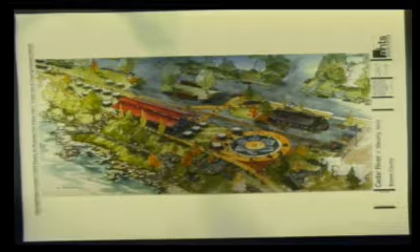In those plans, we had planned a wood deck at the existing scale building. It's made out of bridge timbers, like 3x10, so they're really strong. When we did the original design, we didn't really know what the existing structure was there, but we wanted to hang it onto the side of that. But a structural engineer wouldn't sign off on that because we didn't know what it was.

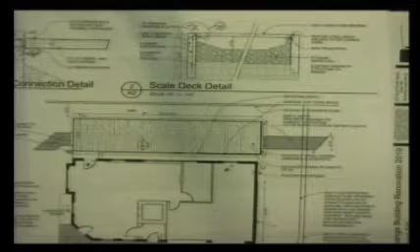So at that point we started digging, and we found out that it was a hollow structure. This shows a plan of that, and all that structure was intact, in fact built very well. It's almost like a swimming pool, and it holds water. So our recommendation was then to drill holes in the bottom, because we did find out from Crystal Plumbing and Heating that there was no water when they did put the water service in. So we think that the groundwater level is low, so we're not going to get a lot of intrusion of water.

So that the rainwater will then drain out of the pit. That plan shows basically a wood structure holding up a wood deck that's designed for 100 pounds per square foot, which 50 will hold a car or a truck. And that's basically what we want to do. We're concerned about putting a slab on grade there because any of the fill material will have a freeze thaw and raise up and down differently than the scale deck, and so we'll have multiple points where we cross that, where we'll have tripping hazards.

Maybe that's all you need to know, or if you want it. Did I read in the materials that you're also proposing to put a sump pump in there? Is that true? We did, but after realizing that we did have a low groundwater level there, we think that the relief valves, or the drilled holes, will relieve all that water.

It's something we could add. If we fill the thing with dirt like they did previously, or rock, if we ever have a problem down there, we're going to have to dig it all out again to find out what's going on. And we don't want to bust the structure up because it's integral to the whole building. Its whole foundation is tied together, so we don't really want to cut into it that much.

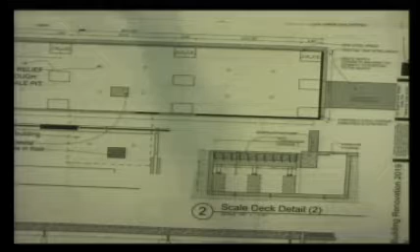So if you look at the section view, we're setting that structure on top of those piers. The piers are wooden, concrete at the base and then wooden, then the wood deck, 6x6 treated timbers with brackets, et cetera. We can always access that from the inside at the access hole that originated there where the scale mechanism came up through, and go in and check the understructure or do any maintenance.

Or if we get mosquitoes, we can go in and take care of them. I don't think we will.

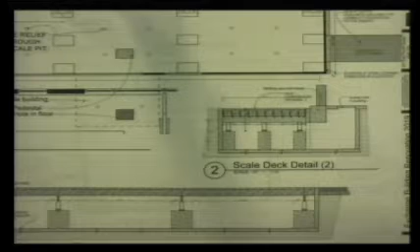What is your best guess as to the lifespan for that wooden platform? How long should we expect it to last? Well, it can last a long time. We've got bridge timbers right here that we've got a trail on, a bridge on the bike trails, 3 inches by 10. It's going to last quite a long time.

Well, a bunch of the ones we saw pictures of are rotted on the bridges we're looking at tonight. Really? Do you have a guess? I'd say the piers and deck will definitely last a lot longer than the concrete, before the concrete cracks. So the guess could be 75 years. This bridge out here was built in 1998, 99.

Is there any concern with moisture, just damp air accumulation and mold in that cavity? Not really. I mean, it was that way for years when it was a scale structure too, empty with the mechanism in it, et cetera.

Any other questions for Larry? So I see we're going to have this access hole in the building. On this diagram here, it looks like there's an access through the wooden structure. Is that the scale? This is inside the building here. Right, so that's where the access is.

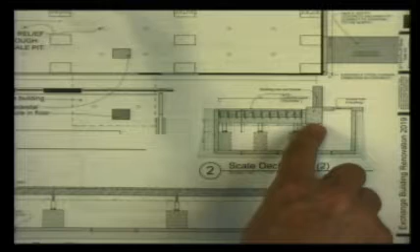There's a big bond beam here that holds up the structure. So over on the left, you have the pedestal, the floor and the hole, and another arrow going up to a square. Yeah, that was the pedestal that held the weight mechanism. It's exactly opposite of the access hole, it's a pedestal, we're not building. So that's basically on the floor of the pit. It actually rises up above the pit too. But that's not going to affect the decking at all. No.

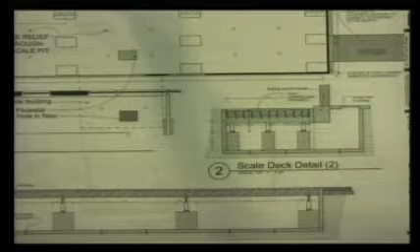How deep is that? Oh gosh, I don't know if I put a dimension on it, but it's about 4 or 5 feet. Was the pit itself? Yeah, the pit itself. So it's below frost level. It's closer to 7. Is it? I would guess. I think that's 7 from the top. But if you're talking about from the bottom of where the base is going to be, from the top?

From the bottom, if you had to have somebody go in there to fix the structure, how much crawl space room would they have? That's a pretty good size, about 4 feet. Yeah, there's room to go in there.

Any other questions or comments? I just want to emphasize to people that this is not a functional scale. They cannot expect to stand on the scale and find out how much they weigh. This is just a historical replacement of what had been there. After they go for ice cream, they can't scale before and after.

We met with this historical group prior to this, and they would like to see the wood deck also. That does raise an interesting question, though. Is it something that it would be possible to drive a vehicle onto? We don't want the general public driving on there, but it is designed to hold display items like Santa's sleigh, an antique truck at the farmer's market, or an antique fire truck. It'll hold all of that.

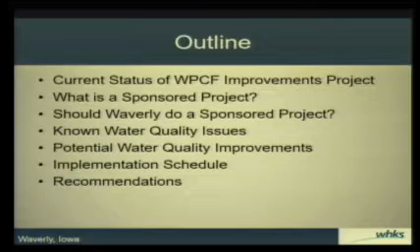So it's been 2.5 years since we've been here. We, at that time, encouraged you to start thinking about this improvements project and moving forward with it, both from a design perspective and financing. So that was December 2016, and you have been proceeding forward.

WHKS has been working on that preliminary design. We've completed what we call the 30% design of that, and have been working with Mike and city staff to review it and hone in on the conceptual plans. But you've also been working on the financing portion.

So the project is now listed on the state revolving fund list, intended use plan. So you're looking at getting a loan through the state. Ultimately, the plans we're looking to complete in 2020, construction in 2021 and 2022, and then your permit says we need to be all done with this and construction done by November 1st of 2022.

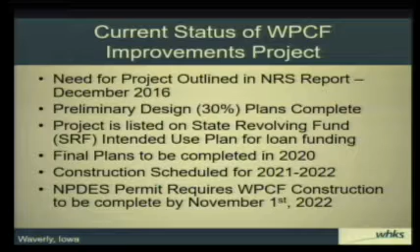So why SRF loan, and what is a sponsored project? The sponsored project is a pretty unique opportunity that the state has put together in conjunction with the SRF loan to help incentivize communities to use the state's low interest loan money. So instead of just getting a locally bonded project, they've provided this carrot for you to say, hey, if you do an SRF loan with us, then we will provide the sponsored project opportunity.

So the project will be paid for with the interest rate reduction from the SRF loan. It takes some of that interest money and uses it for this side project, and it's approximately 10% of your project loan amount. So we were talking about a roughly $9 million project, so that's a pretty good chunk of change, $900,000 water quality sponsored project.

There are some rules that go along with it. It must be done in the same watershed as where the city resides. It has to kind of benefit you locally, and you need to work in partnership with another water quality organization. You're going to have to partner up with somebody to do this work, and there needs to be a specific benefit shown of how this project is going to improve the water quality.

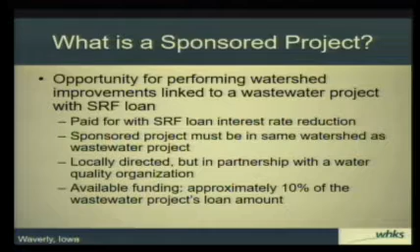This map here just shows the different water quality sponsored projects throughout the state. There's a little over 80 of them currently. Roughly half of them are either under construction or have been completed, and then there's another 40-plus projects that are in the planning phase right now. So this is definitely something that has been catching on, and a lot of communities have been starting to do these sponsored projects.

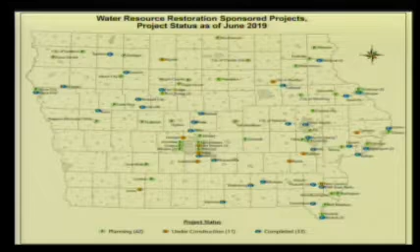And what does that project entail? There's a litany of different things that you can do for water quality improvement. Some examples: permeable pavers, rain gardens, bioswales, things that will help that surface water quality, stream bank stabilization to help reduce erosion, and then wetlands restoration. And that's one we're starting to really focus in on, as wetlands restoration for nutrient reduction at the surface in addition to the treatment plant.

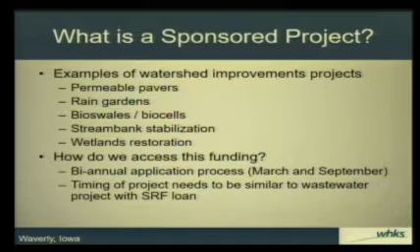And how do we get this money? There's, like Mike alluded to, a March and a September application period. So twice a year, if you're on the intended use plan, you can submit an application to try to get on another list to get the sponsored project funding. The timing of this needs to run in parallel with your treatment plant project. So we're not able to really do the sponsored project until you have secured the loan with the state, and they know that you're going to be taking this money through the loan so that they can use that interest rate reduction to get you your sponsored project money.

So, okay, that's great, this sponsored project program exists. Why should Waverly do one of these? Like I mentioned, there's about $900,000 of money that's there to be able to be used, so that's a pretty good chunk to take out for a project. And in addition to that, and Nate can talk about this a little bit more, there's this partnership that we are recommending could potentially result in even more local funding, or sources of funding through other organizations that could pair up with your sponsored project money and create an even larger project.

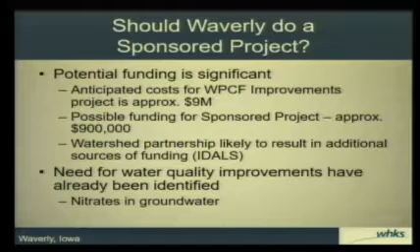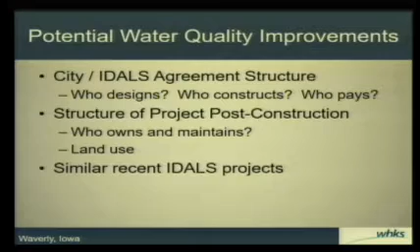So these projects, what do they look like? Well, they're essentially building a small dam that creates a wetland impoundment behind it. This is one that we finished a couple years ago in Floyd County. Their designs are pretty standard - they use these sheet pile weirs to control and regulate water level, and then maintain drainage throughout the system, as that's a really important component. So I thought it was important for you to see a picture of what some of these projects would look like.

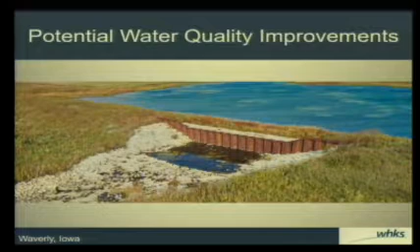And then we get into the implementation schedule, and this really goes down to how this is all coordinated with the SRF portion of the project. So we're looking at preparing an application in June or July of this year, with approval in August, and then assuming that would move forward, we could work with IDALS for preliminary design in the winter, spring of 2020.

Receive the design concepts from the DNR spring, summer of 2020, and completed design in 2021. So then the whole process would be that the SRF funding for the loan gets approved, followed immediately by the issuing of the money for the wastewater plant, then this money falls in place after that. So the construction of the sponsored project essentially starts shortly after the wastewater plant and occurs concurrently.

So when this is all said and done, basically that money gets turned over to IDALS. There's no responsibility for maintenance, there's really no responsibility from the city at that point. You're just essentially taking money from one state pot, moving it over to the next. The landowner is responsible for the maintenance. It's just that you as the city receive the benefit in terms of significant nitrogen reduction, and ideally that is received favorably by your wells.

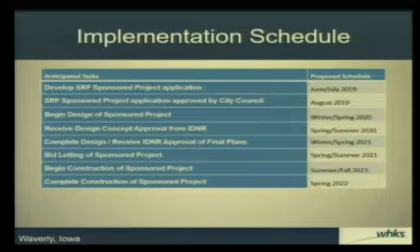So with that, we were recommending that we proceed with development of the application, and come back here in August. We are working with IDALS right now to shore up some of the landowner interest and work on some of the feasibility. These things are very preliminary at this point, as I said. We can't go too far without having the funding in place and having the commitments in place. And then pursuing sites either F and G or both, depending on the level of interest by the local landowners.

So that's kind of what we're recommending at this time, and we'll have to see where all of this leads us. It's not to say that if one or both of these projects didn't work out, other options for this money might be available, but right now we see this as your best bet in order to address your needs.

Okay, thank you. Questions for council? Can you put that slide up there again, though, just while you guys are asking your questions? Could you put the slide with the wells up there again?

Sure. Thank you. Kind of the answer to that at the end was, is this a one site only or multiple? And I know they had the 6 on the east side and the 1 on the west side that were kind of identified there. So potentially down the road, we could end up having a series of these staged along there.

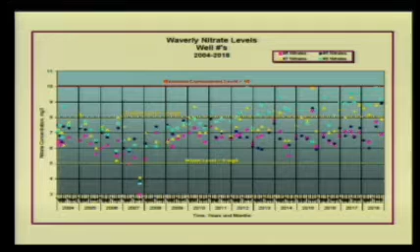Yeah, and I think it builds a lot of goodwill too. I mean, it's showing you're getting benefit, but so are people in the greater watershed, despite the shared cost.

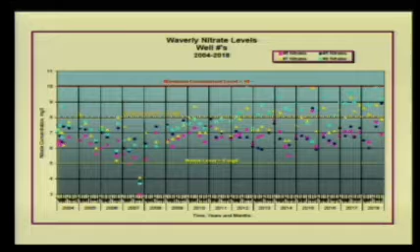Are there any other requirements to either the grant or applying for the state revolving fund monies, or the fact that you partner with someone? Are there any hidden costs in any of that? I mean, sometimes you have to use certain materials or certain contractors - are there any costs there that we might otherwise be spending less on that you would anticipate by virtue of being involved in this? No, essentially it's an opportunity project, where you see a need and can address that need and push it out to your watershed to do this type of thing.

That's really what they're encouraging, but it's not intended to be a way to get additional funding from the city. This is a way for you to focus state funds on things that you value, things that you see as important to your community, versus the state picking for you, essentially.

To answer that question from the SRF loan perspective, there are some additional costs with the SRF loan versus just local bonding. The SRF loan does have some costs in terms of wage rates, and they would have the American Iron and Steel requirement that would drive up some of the prices of your wastewater treatment plant project. If you were not to do the SRF loan and locally funded instead, there'd be a slight reduction there. But we think that the sponsored project reward is worth the added cost of utilizing the SRF loan.

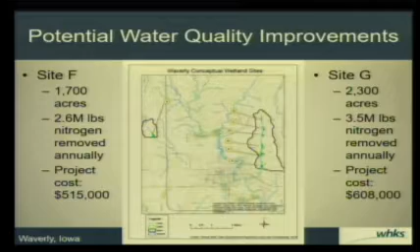So a structure like this provides multiple benefits. It does provide a limited amount of flood control, but it's not really designed for flood control—just by its very nature it provides a limited amount. They're really designed to be shallow pools of water, less than 3 feet deep, so that it can establish all the wetland plants and the microbes in the soil.

And it's those microbes that take the nutrient water, the nitrate-laden water. It comes into the upper end of the system, and by the time it gets to the front end, or the release side of the system, most of those nutrients are digested, if you will, or metabolized and released into the atmosphere.

Bill, I'm not always good at reading these terrain maps, and even the scale I might be off on, but F and G look kind of close to that property we talked about a while ago, where development wasn't approved in the end. Is that over by— it's east, northeast of there. Is there some way to enlarge that? Oh, is it northeast? Yeah, okay, northeast. Okay, well then never mind.

And where are these two wells? Wells 7 and 8, relative to those sites. If you know where the Cedar River Parkway ties into Highway 3 East, that is very near well number 7. So you turn onto the Parkway and well 7 is just off to the left.

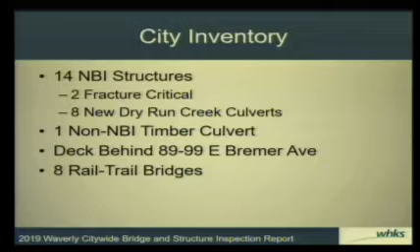This deck, just to get my bearings right, is this south right here? Just to the south of us out here is the deck we took a look at, and then the rail trail bridges. We'll walk through each of those and what we saw and what needs to happen.

Real quick, an Adams Parkway update. This bridge was built back in 1968, and you expect maintenance on a bridge. This bridge is actually beyond what we'd typically expect needing maintenance, partially because of the volume. Also, it was constructed well, so an overlay, which is what's being performed out there, where they mill a portion of the surface off, make repairs to the deck where necessary, and pour back a 1 3/4 inch thick overlay surface, is typically expected in the 25 to 30 year range for the DOT's higher volume bridges. So we're looking at a significantly longer life out of this bridge before needing those repairs.

Additionally, at the ends of the bridge we're replacing the joints. The previous joints were just 2 plates that slid over top of each other, so they didn't prevent water from getting down. The joint being installed now actually has a gland in it that allows the bridge to move and stretch, but also keeps water from getting down and affecting the ends of the beams and bearings. So it'll provide additional life to the abutments and to those beam ends and bearings.

So with this repair, we'd hope to see again at least 25 to 30 years before any additional maintenance is needed. The way bridges are designed, we take into account that wearing surface, that additional 1 3/4 inch being put on ahead of time, so this doesn't have any impact on load restriction. We verify that ahead of time before we raise anything or add dead load, obviously.

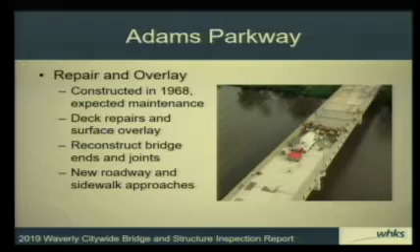Fracture critical is a non-redundant steel structure with tension elements — that's the book definition. This Adams Parkway Bridge is a steel bridge with 2 beams, and because it only has 2 beams, it's non-redundant, meaning if one of those beams failed, the whole structure fails. The truss out on 3rd Street, because there are only two trusses running parallel, if an element in tension would fracture, it wouldn't be able to support itself because it can't distribute the load. If you have 3 or more members, you have redundancy in the system. So any steel structure that doesn't have appropriate load redundancy is considered fracture critical.

So that's somewhat helpful — that's our book definition from training. For example, the Cedar Parkway, where we're putting in this great new bridge, has all kinds of extra beams, made of concrete. So it is not fracture critical. Exactly, it is not fracture critical.

Okay, yeah, that's helpful. The unfortunate incident on I-35. One of the most public recent failures of a fracture critical structure was up in Minneapolis, I-35 West, because of one gusset plate and a lack of redundancy. When that gusset plate fractured, because of the age, the loading, the stresses that were built into that structure and what was all going on at the time, the whole thing went into the water.

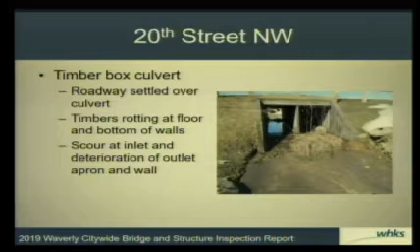As you can see in this next picture, with my hammer, I didn't have to hit it - I could just poke the tail of the hammer through there. The way these are constructed is that they're individual 2 or 3 inch boards laminated together, and that's one board that's rotted out. There's not large areas; it doesn't progress the way spalling in concrete progresses, because that's a continuous wall or continuous mass. It'll isolate to a specific timber before it spreads rapidly because of the construction type.

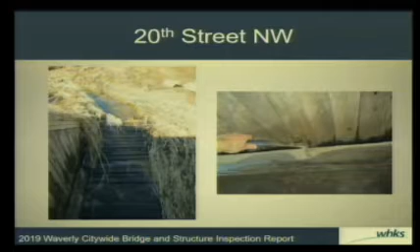So we don't have serious concerns about this now, but we want to bring it to your attention because down the road, it's not going to last forever. You're seeing timbers rot through. There's a little bit of scour at the inlet. At the outlet side, there's a CMU wall and the apron coming out where we could see some of the block face beginning to fail.

The settlement - we probably don't know enough about the right-of-way in the area. Does the city own that wall, or the property owner? That would all come down the road in planning for some sort of repair or replacement project. Go ahead, question, Casey.

Just for location, is that the one that's part of the curve? Yep, if you're going north before you hit the curve, if you go straight instead of going north and then west on the curve. So it'd be south of Fifth Avenue? Yes. Okay, yep.

So the recommendation, or the perceived replacement there, would be a concrete culvert, pretty similar - probably a single cell would fit there. There are sizes large enough to replace that as a single cell. We're looking in the neighborhood of probably $120,000 to $140,000 to do the culvert and the roadway work adjacent. That's something we want to make you aware of so the proper planning is there.

I don't think this is a 2-year thing or a 5-year thing necessarily, but it's probably a 10-year horizon thing that you want to plan for, and be watching if spot repairs are necessary or some protection needs to be installed to extend the life a little bit until the city has that budgeted and planned for.

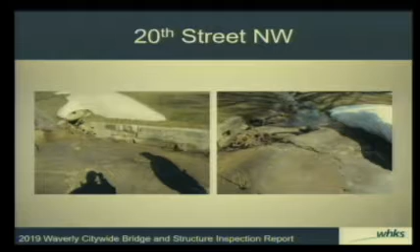Any questions on that structure at all?

The next area that Mike asked us to look at, a little different than we've done in the past, is this deck off the north side of the buildings on Bremer Avenue. It was brought to his attention that the public may have seen some paint flaking. Corrosion is a really ugly thing, and it's in your face when what's directly adjacent is bright green. So it was brought to our attention, and we had the plans Mike shared with us, so we could investigate how it was built and what was out there.

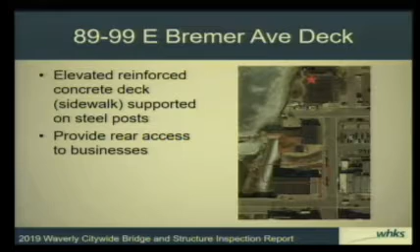From our side of things, structurally, is the amount of corrosion a concern from a loading perspective? What we found was that primarily the corrosion is taking place on the top posts on the north edge, where the sidewalk drains away north of the buildings and over the edge, dumping whatever salts those business owners are likely throwing out there, understandably so. As an elevated sidewalk, it naturally freezes very quickly, so ice mitigation is necessary. That's the primary cause of the corrosion you're seeing there.

One thing about steel is that when you get that leaf rust, once the paint system fails, the corrosion is expansion of the laminations of steel. An inch of lamination that spreads away from the steel is likely less than 1/16 of the actual steel loss, because it goes down to a microscopic level. So the corrosion we found isn't a structural concern to us, but you now have exposed steel that every winter is cyclically exposed to salt, and once exposed, the rate advances substantially. So we'd recommend getting this programmed quicker than that timber culvert for repairs to the paint system there.

We prepare plans and do a lot of observation for the state for bridge painting. It's a similar procedure here. Because of public access, some railings might be able to be unhooked and hauled off site and done in a shop and reinstalled, but these are embedded in concrete, so they'll have to be done on site. The likelihood of dangerous contaminants in this paint versus bridge paint is very low because it's not that old. You'd probably follow the same procedure though - send in a paint sample, and as long as there's no dangerous constituents, you wouldn't need total containment.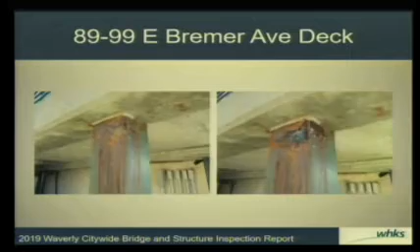One area where it's a little more pronounced is coming down the stairs on the west side, and again, salt on those stairs. They're supported by a steel outrigger that's bolted to the wall, so the bottom's there. All that salt slowly runs and drips down, and that system has failed. Because that steel is expanding as it corrodes, it's anchored and embedded into those concrete steps, so it's spalling some of the concrete adjacent to those anchors as well. So again, another reason you want to address this before the spalling advances - those steps need to also be replaced. Just bringing that to your attention.

But again, this is an area where more than spot cleaning - on the stair tread supports you probably want to clean and paint the whole piece, just because of the extent of the corrosion there. But again, it could easily be in the $50,000 to $60,000 range, depending on the level of containment and the type of removal necessary.

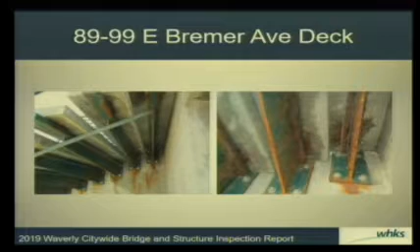So the way you're describing the corrosion caused by salt here, sounds like there's no way of getting a good fix on this - this is going to be an ongoing problem. It's likely an ongoing problem.

What we typically attempt to do, what we've done at the Cedar River Parkway with the plans we prepared there, is galvanizing before painting, so that even if the paint system fails, there's a secondary coating. That's kind of the standard of practice now that's developed over the years for exposed railings and things like this. It's not done everywhere. It's definitely a little bit of added cost, but it should improve the lifespan and reduce the maintenance on railings that are going to be exposed to road salt or sidewalk salt.

Is there any way to mitigate the salt water on the deck from rolling over the edge and back underneath to get into those beams? Going back here, you can kind of see on bridge decks on the overhang, we put a drip edge cast on the underside of the edge, so that it doesn't migrate down the underside of the deck to the face of the beams. Something like that - you have a drip edge on the side of your roof that directs things along the side, away from your fascia, so it doesn't collect there and into your gutters. So something might be able to be installed to mitigate that.

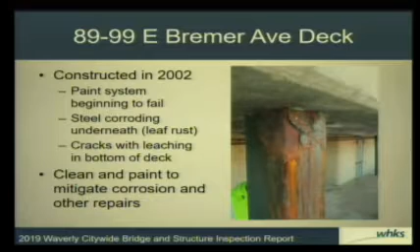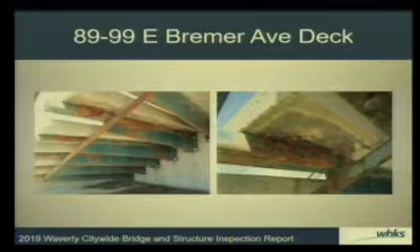Another picture of the steps again, and up close on the right-hand side, you can see the spalling. The extent on the railing is pretty minor, and it's really isolated primarily to that base plate. My best guess is that it's because of the salt - it runs past that and down below, and that's why on the posts, you're seeing the worst case at the top on the outside.

So installing something that would act like a drip edge could definitely help prevent that from happening on the posts down the road. Again, on the railings, what's on the base plate - we're not seeing expansive leaf rust, we're not seeing major section loss. It's really just starting at the base plates of those railings. Not a whole lot you can do there unless you install some sort of grout pad or spacer, which could be done, but that's to be seen, probably how far you'd want to take it. Again, added cost to modify the connection detail there.

And you can see in the picture on the right, the last thing to bring to your attention is that those salts aren't just migrating down to the posts, but they're leaching through the deck. Concrete naturally cracks - that's what it does, we know it does that, as designers. We try to design the reinforcing inside of it to distribute those cracks evenly, rather than having a large crack in one location, because that's a natural entry point for corrosive elements. This is distributed pretty evenly, but where there is cracking, you're starting to see that leaching of those salts in through there.

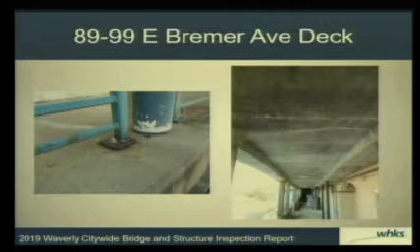All right, the rail trail is what I think really initiated us coming to talk about our inspection. As Mike mentioned, we do these inspections every 4 years. We inspect trail bridges for some cities every 4 to 5 years, similar to yours. We inspect bridges under 20 feet for some cities and counties on an extended basis, some every 24 months, because we're already out there. Historically we've been doing every 4 years here, and it's been a few years since we've been out, so we just wanted to provide an update.

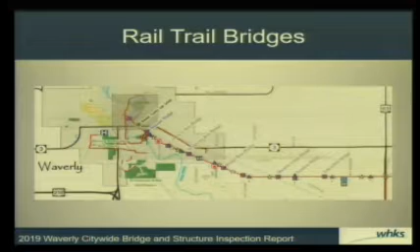As Mike mentioned, to plan for the construction vehicles that may need to use the bridges to repave the trail down the road, there are some repairs that need to take place. The trail itself, built in 1999, took advantage of what was out there. Rail trail conversions are great because those bridges were built in a really robust way to support train loading, which is a lot more significant than the trail loading you're seeing now, and even more significant than the truck loading, as you'll see in a couple minutes here.

But it's significantly older than the rest of the trail. We utilize the existing timber stringers that run down the bridge, and we put new cross ties and decking and asphalt and rails on top. So we kind of replace the deck and up, and everything below that is older, and it's probably past its design life, and we're seeing the results of that now.

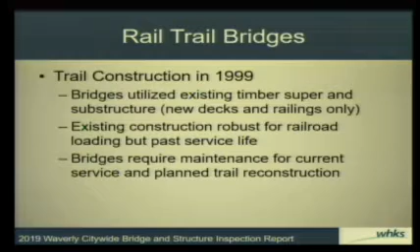So there's some maintenance really required to keep these in service, especially for construction vehicles in a few years, and probably some consideration for the council and the community from a programming standpoint of what's the best direction from a cost benefit. We've got a little bit of cost information, but it's probably some sticker shock that we'll get to in a minute.

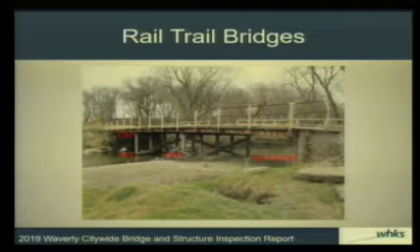And so there's an abutment pile bent and pier pile bents, meaning that they're individual pile columns tied together with some bracing. So you can see I've noted the piers. And then on top of that is a cap that connects the heads of those piles and supports the beams that run across. So just trying to keep some language out there in front of you, so when I say abutment and pier, you know kind of generally where I'm talking about. Abutments are at the end, piers are in the middle.

So there's 8 bridges out there. We'll go kind of out of town, back towards town. So Ivanhoe's is the first one, farthest east. We're just going to go over condition of what we found out there.

So the west abutment, the cap was found to be split and hollow, and so that's a big 12 by 12 or 10 by 10 - most of these are 12 by 12 - but square member that's running on top of the piles, supporting the ends of the beams of the bridge. So it's split. There's hollow sounded areas. Nothing that we could break through or warrants an immediate action.

Third and fourth piles, these are typically 6 piles in a row, but numbers 3 and 4 from the south were found not to tangibly carry load from a structural consideration. We generally rate things on a 25% scale, and anything under 25 we don't consider to carry load, because we're trying to predict as best we can the lifespan till our next inspection. That's our approach. And so if it's less than that, we don't want to consider it carrying load for 2 to 4 years, depending on inspection cycle. So some of these are carrying some load when we say worthless, but it's our way of saying that they're at the end of their life, and we structurally aren't considering them to carry load.

So you're saying that they did function once, but they're not functioning now? Precisely. But these were built for train loading, and now we're subjecting it to significantly lower loading. And so we'll get into which ones actually have structural capacity reductions in a minute.

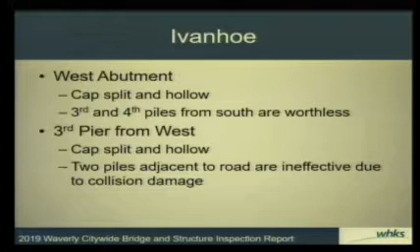There's a pier, third pier from the west, where the cap is split and hollow, and then 2 piles - they're very hard to see, especially from this angle. I'm going to say I didn't take this picture, but that's all right. 2 of the piles had some collision damage because there's a roadway that passes right underneath, right next to that pier. And so there were some repairs that were made that no longer are effective. You can see on the picture on the right, you can see down into that one pile cap.

This is again outside of the bridge, and so it's not really supporting anything at this location, but because it's a continuous member, that deterioration is creeping in longitudinally, and it has a reduced capacity.

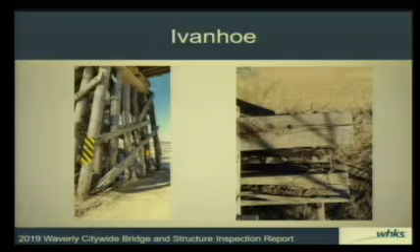At Baskins Creek, at the east abutment, we found 1 pile to be worthless and others deteriorating. The west pier has 2 piles, the south 2 piles, that are worthless. You can see some of the necking on that picture. It's a little bit far away.

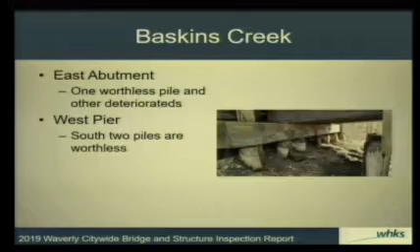I tried to include a picture, but they aren't all perfectly of the defect we're talking about. At Prairie Run, you can see this pile, one of them at the west abutment that was found to be worthless. There's two there that were found to be worthless. It's hard to tell exactly from this picture, but you can see down into that pile.

The way wood works is that at the ends of a longitudinal member, like a pile, post, or a 2x4, that's where the grain wicks moisture in. So naturally the top of a pile cap will wick moisture down into it and it'll rot from there. This one wasn't directly under the cap, and we can see down into where it's rotted out and is no longer providing full and good support.

The east back wall's got some planks that are rotting through, meaning the fill behind those planks underneath the trail is starting to come through. If that progresses, you can lose that fill support and the trail can collapse behind there. Not an immediate concern, it's not large enough, but it's an area to watch and we'd recommend repair. The second pier from the west has one worthless pile.

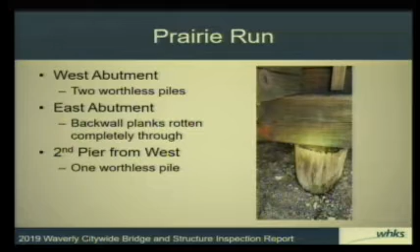At Slemmons Run, the cap at the west abutment split and rotted. You can see as that runs up the picture, that board sitting on top is the first bridge beam that supports the deck. So in that case, we're starting to see that deterioration enter under where the loads are supported from the deck above. This is one we rated based on incomplete capacity and reduced section. We'll get into what we came up with in a minute.

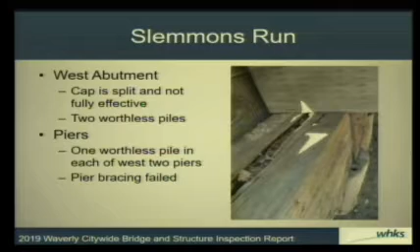Two worthless piles also at this abutment, and then one worthless pile in each of the west two piers, and the bracing has failed. Here's the west abutment cap again on the left. The third pile, that end pile, doesn't look like a pile because it's a shell at this point that we broke through with our hammer when we were sounding it. That one's worthless, really worthless. And in the picture below, again, a pile that's no longer anything but a shell.

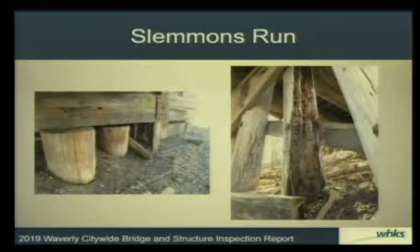Once they're wet, once there's a void, we see insect damage. And again, these piles are probably at least 50 years old, so it's not uncommon to start to see this type of deterioration.

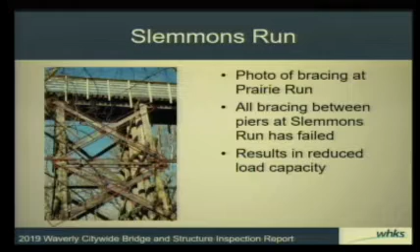Not having that bracing is okay for the loading we're currently seeing from trail users, but it's not okay for construction equipment. So replacing the bracing is another one of those recommendations for allowing this bridge to be used for construction equipment down the road.

Cemetery Run, this is a better close-up picture of another one of those piles: the west abutment has one, and the east abutment has two. Some rotting of that cap, but again, those abutments become shells, and once you really break through, we sound them, but we don't know for sure. If you can't see it and you're only listening, we have to use some estimation. We try to be conservative, but at some point this is where they end up, since hollow grows from the inside out, and at some point you break through.

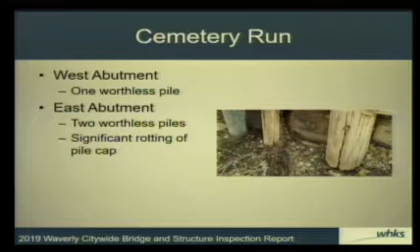This is the track that really all of the timber piles out there are on. Then finally, the Cedar River Bridge, just to the north here of City Hall. The abutments and piers show some deterioration. Those piers are constructed out of limestone blocking with mortar between, and there's some breakdown of the mortar. We haven't seen significant changes. As I mentioned earlier, it was our first inspection out on 20th Street.

We don't know what the rate of deterioration is. We've been inspecting these for several inspections, and we aren't seeing major changes. We're not seeing settlement. There's deterioration, but it's not a red flag concern because we know it's not progressing beyond what it was the last inspection. It's very similar to that, so it's not an immediate thing to repair, and it's not advancing significantly. The deck planks are something we'd probably recommend going out and making spot repairs on, primarily from a user standpoint. It's not a major structural concern or danger, except for serviceability—somebody gets a toe stuck on it, or on a bike, the ride isn't as nice. After 20 years, you expect to see some wear and tear, and that's what we're seeing in the deck out there right now.

So, Rod, do you think that damage was caused by a golf cart?

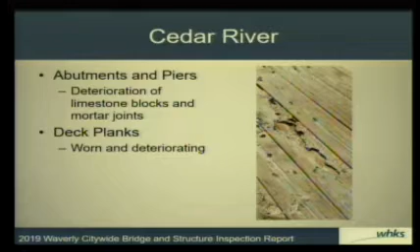As Mike mentioned, to get the bridges up to snuff for construction vehicles, there's probably about 30 piles we'd recommend repairs at, about 10 pier caps, and that one back wall we mentioned.

I jumped the gun here—back to restrictions, sorry, we'll go backwards a second. Baskins Creek was one we rated and found to limit trucks to 22 tons. That's not a major restriction—you're not planning to go out there with asphalt trucks right now—but because of the lack of total ability of those piles to support the loads, it's reduced based on their effectiveness.

At Slemmons Run, at the west abutment where that cap was rotting and not complete anymore, and there were a couple of worthless piles, we said no maintenance equipment. This has all been passed on to Mike already, so this isn't his first exposure to it—no maintenance equipment until repairs are made. There's one pile that's actually got a 2-inch gap between the top of the pile and the cap. It's likely from construction, but by shimming and blocking, you provide additional support that engages that pile into the loading. So there are some immediate things that can be done, but replacement of the worthless piles is a much more major deal.

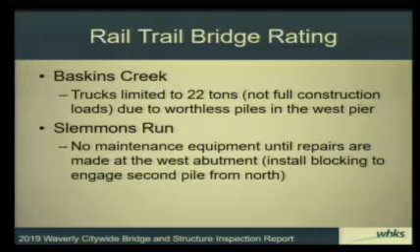So as I was getting to, jumping the gun a bit—to get through the next 5 to 10 years and through construction equipment for repaving the trail, about 30 piles, 10 caps, one back wall, and that bracing at Slemmons Run. Because of multiple sites, individual piles, and sometimes hard to access areas, we do our best to estimate what that looks like, but we think those repairs could be in the $150,000 to $175,000 range to get things up to a 5 to 10 year type of fix.

It's really hard to say what the bidding climate will be, and when you're doing small repairs at a lot of different little sites, the mobilization goes up, the access is pretty difficult on some of those slopes, so it's not going to be an easy project, even though timber is an easy material.

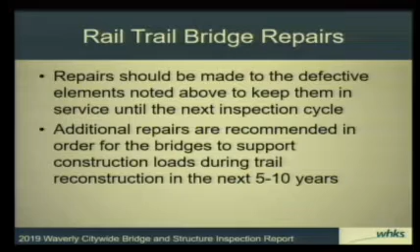There are some great things out there that the DOT has done in researching methods of repairing piles in the field, reusing what's out there, and we've provided some of that information to Mike. We've seen a lot of county engineers use that with their own forces. We've also seen cities and counties hire contractors to come in and use those methods that have been tested and shown to work. There are also helical piles that can be installed with small equipment like a small track excavator or skid steer with a pneumatic rotary tool that screws these into the ground—another option to replace piles and provide supplementary support in the areas that really need it.

But you're talking probably similar costs. So what it boils down to is maybe providing the contractor options and alternatives that would get you the best, most favorable bids, letting them choose the method they're best at or that fits the circumstance. That's really probably what the plans would consist of—identifying locations and providing typical repair options that allow the contractor to use what works best for them in the situation they encounter in the field.

The cap replacement is going to have to be jacking and supporting the structure, removing and replacing. So there's not a lot of ways around that to replace the timber cap that goes on top of the piles.

But there's options out there that are tried and true that can be done in some of those difficult access situations. We've talked through some of that information with Mike and want to provide it to you as well, just so you know this is the type of repairs we based our estimate on, along with best estimated inflation for the cost to hit multiple sites and difficult access areas, and to do small projects at a lot of sites.

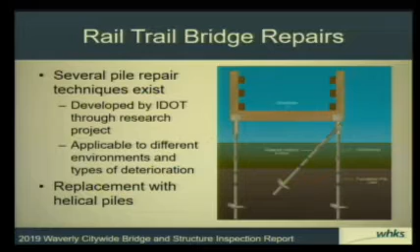As far as funding, I know there's grants and those types of things out there to put the trails in. Is there any programs out there to help maintain them?

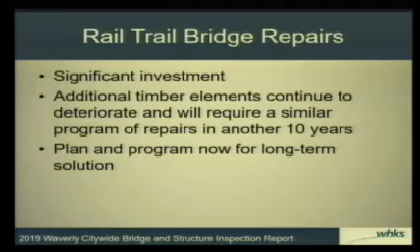There's not much out there. We've seen more. I think, again, this is similar to the nitrate discussion - you're not alone in this. Communities that utilize funds to set up rail trail conversions are seeing substructure deterioration because it's the end of that railroad construction life cycle. Because it's kind of a known issue now, we're seeing some communities or county conservations that have the resources or ability to fundraise set up endowments. And that's probably your best bet from a maintenance standpoint.

That's kind of where we wanted to finish - it's a significant investment. $150,000 and up is not nothing, and it's a 5 to 10 year deal. You could foreseeably be spending that again in 5 to 10 years after that and just continue. So from a city planning standpoint, we want to make you aware of it and help you understand that so you can program and plan the best possible approach.

For your budget, for your setting, compare that with replacement. Replacement - we ran some real quick numbers based on replacement trail bridges we've done in other areas, and the range from some of the smaller structures out there could be $150,000 to $160,000 for the individual structure. So we're talking about that for a repair right now for several of them. But then you look at the Cedar River Bridge and you could easily spend $1.4 million. So for a total price tag, if you're going to replace all 8 structures, we could easily see that probably go to $4 million for the structural work alone. That's not going to be achievable probably in one shot, and that's where I'm going to hand it over to Mike.